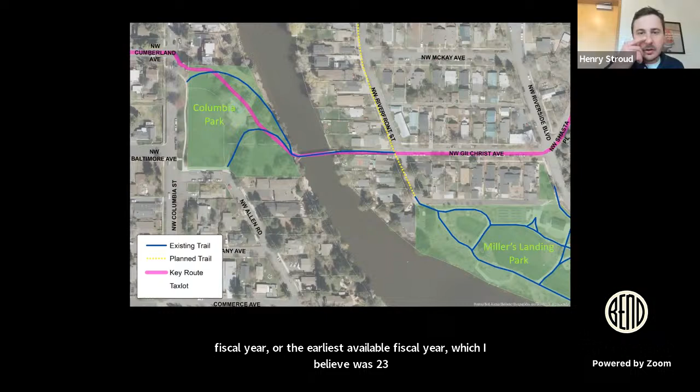So just to give you guys a little bit of a sense of the area, if you hit forward one time, there should be some pop-ups that come up. Yeah, do one more and show all of them. Go back. Yeah, sorry, you're fine. So there you can see the location of the bridge.

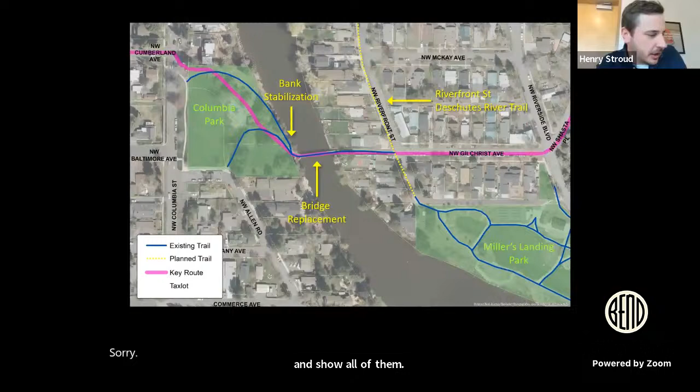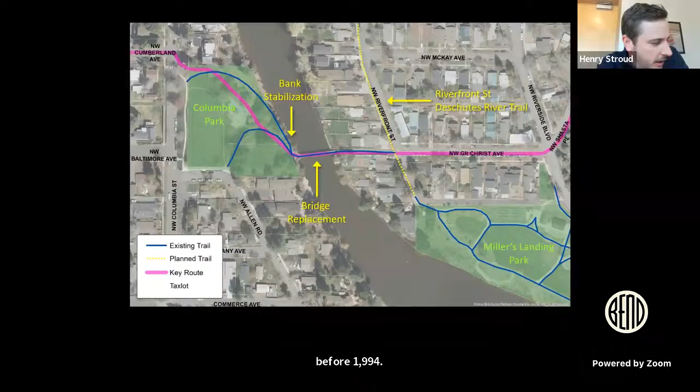The bridge is a wooden structure that we know was built before 1994. I don't know the exact date, if anyone knows it, I'd be really curious to know. But long story short, the bridge does not meet modern design standards for multi-use trails, and it's also started to see some structural deterioration.

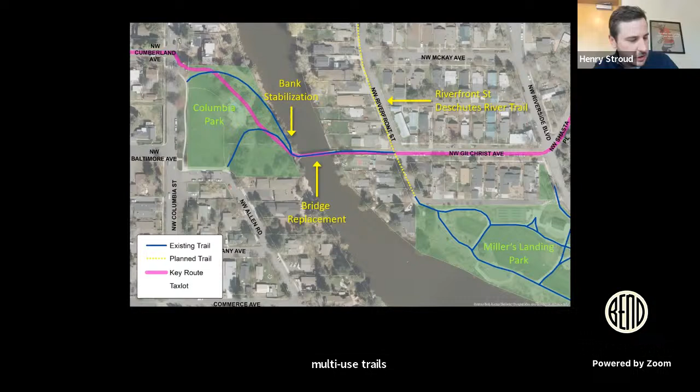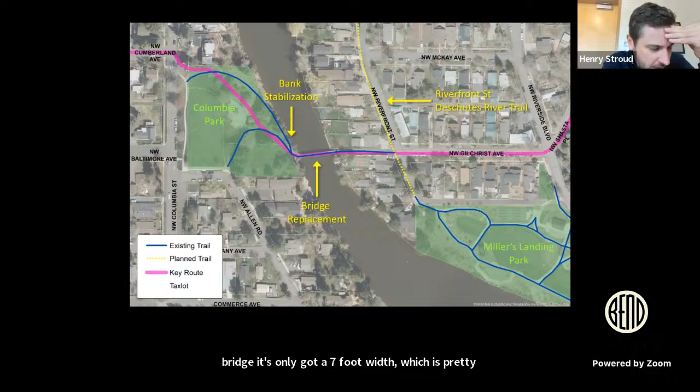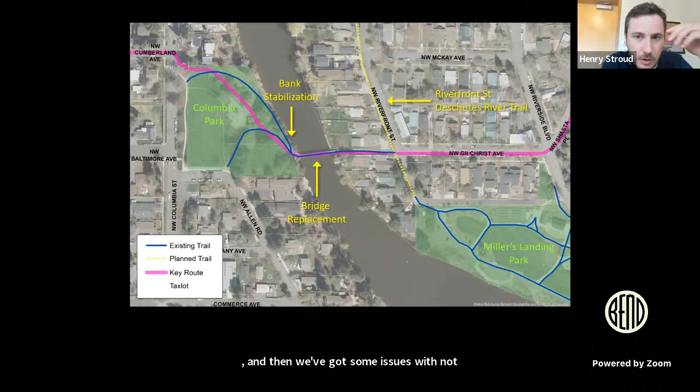More specifically, the current bridge only has a 7-foot width, which is pretty inadequate to accommodate two-way bicycle traffic. The wooden decking surface is really uneven, and we've got some issues with not meeting ADA grades on the eastern approach, when you're coming off Gilchrist Alley onto the bridge.

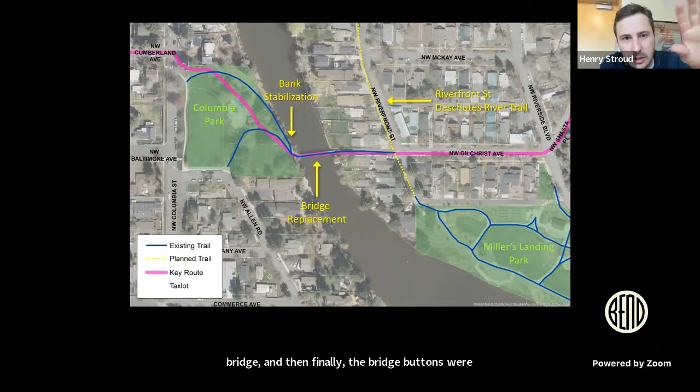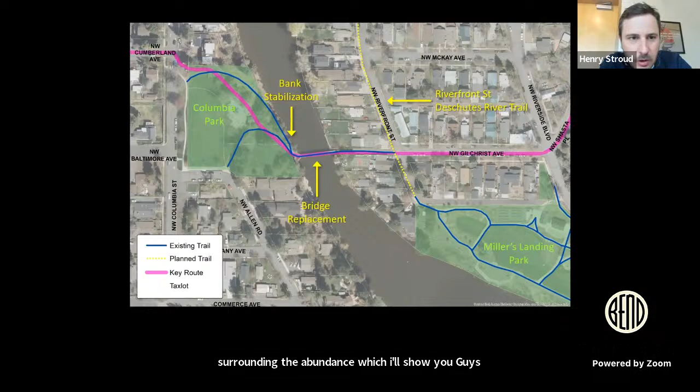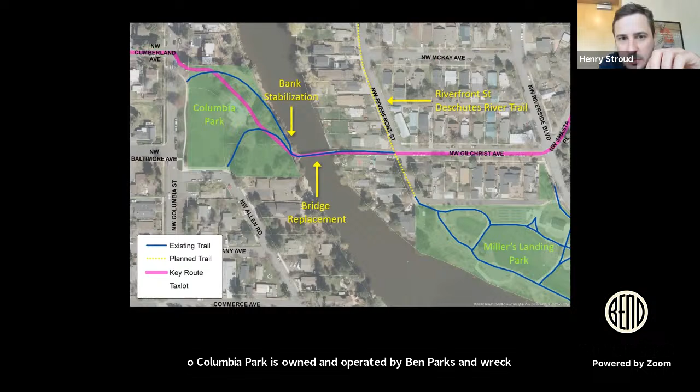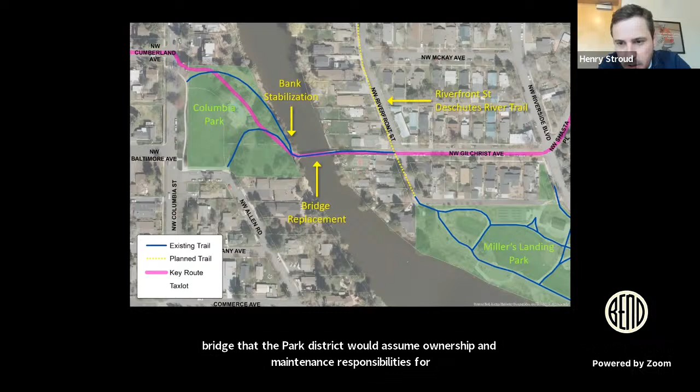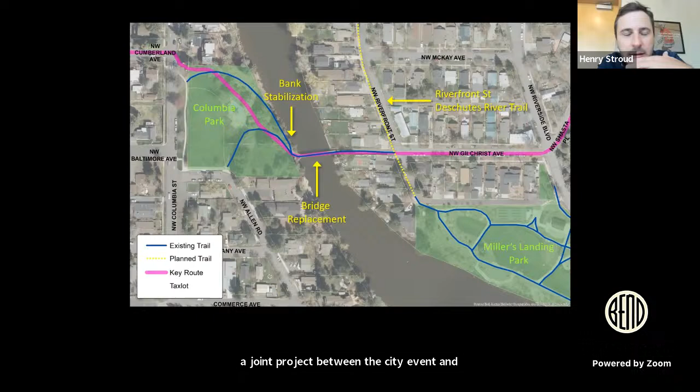So Columbia Park is owned and operated by Bend Parks and Rec. The bridge itself is owned and maintained by the city of Bend, but if we're able to replace the bridge, the park district would assume ownership and maintenance responsibilities. You can see the proximity to Miller's Landing Park, and of course the Riverfront Street Deschutes River Trail project, a joint project between the city of Bend and Bend Parks and Rec, partially funded by a grant from previous years, a previous STBG grant.

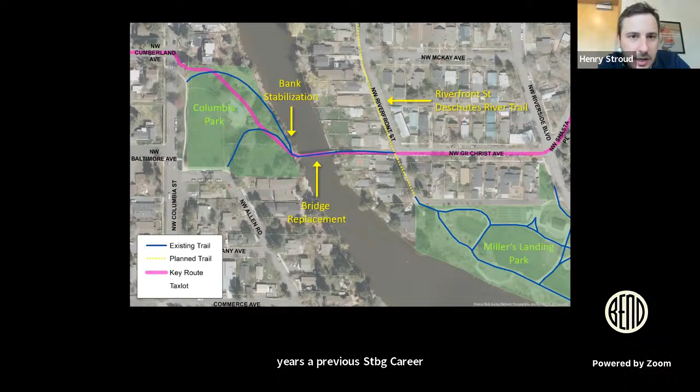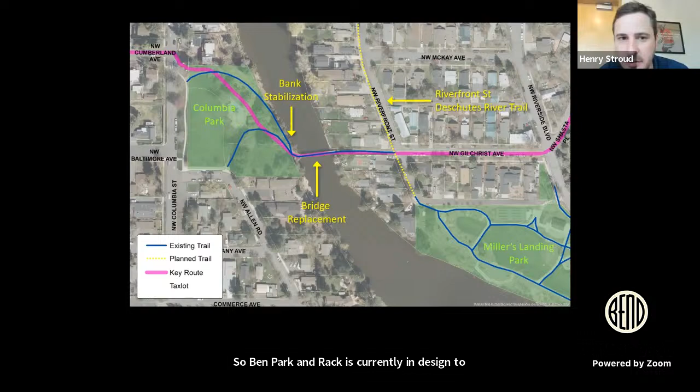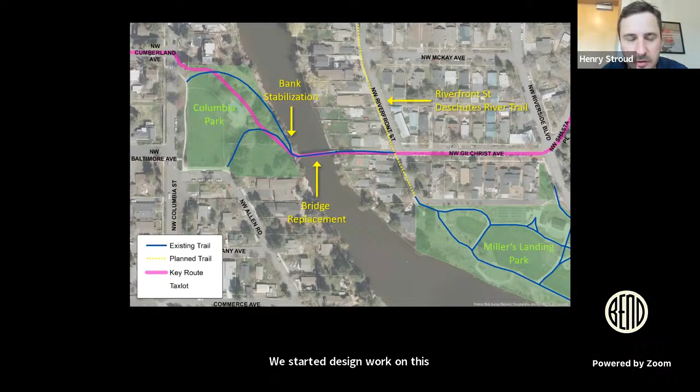The other thing I want to point out is the location of the bank stabilization project. Bend Park and Rec is currently in design to stabilize and replace a failing user access point that's located immediately adjacent to the bridge. We started design work on this project, I think earlier this year, with Environmental Science Associates, or ESA.

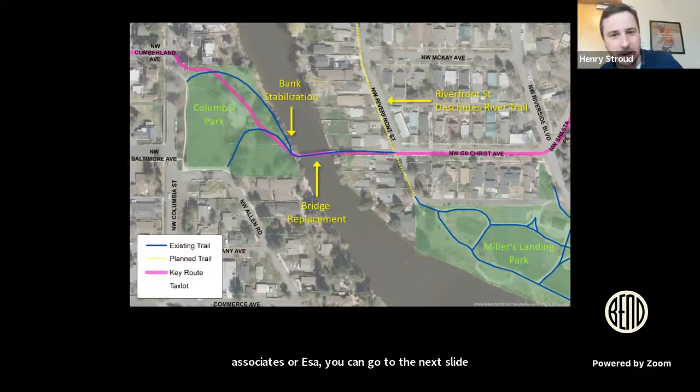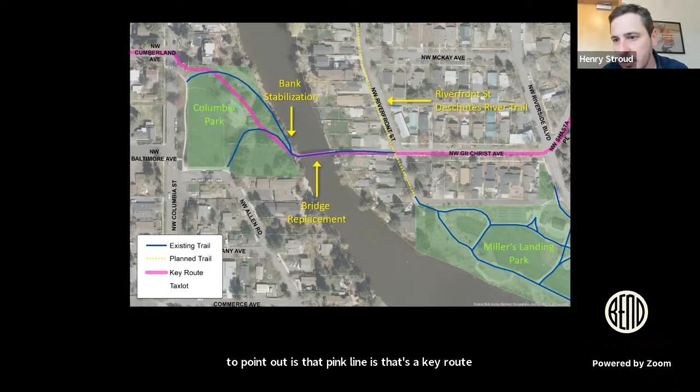Go back to the previous slide - the one other thing I want to point out is that pink line. That's a key route identified in the city's new transportation system plan. These key routes are areas the city has identified as priority corridors for improvements to the bike and pedestrian system.

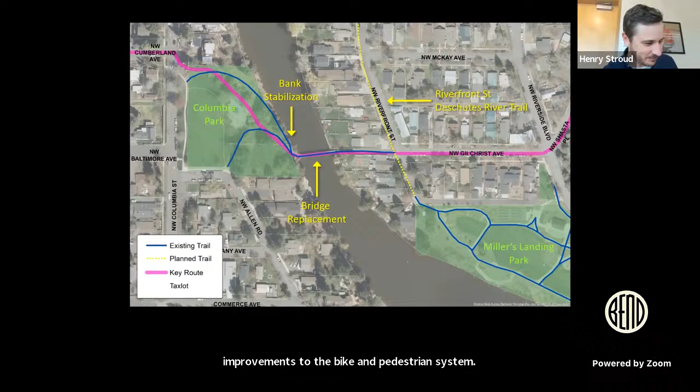That's the failing access point that we shut down a number of years ago and that we're currently designing. It's immediately adjacent, and we think that by incorporating the bridge replacement into that project, we have a much better chance to get a cohesive design and really redo this area all at once.

This is Greg Bryant. I've got a question - are you looking at trying to get that access point to the river again? Ian, do you want to step in on that?

That's a great question. We are currently working through high-level concept designs, which will be taken out to the public for feedback this winter. We have not decided whether there will be a new access point or if it's going to be closed off entirely. We're doing a complete thorough analysis of existing conditions, and then we'll be presenting two different options - full closure versus access to the public - to see if it's feasible or even warranted to reopen the access point. So the short answer is that we don't know whether there will be an access point there in the future.

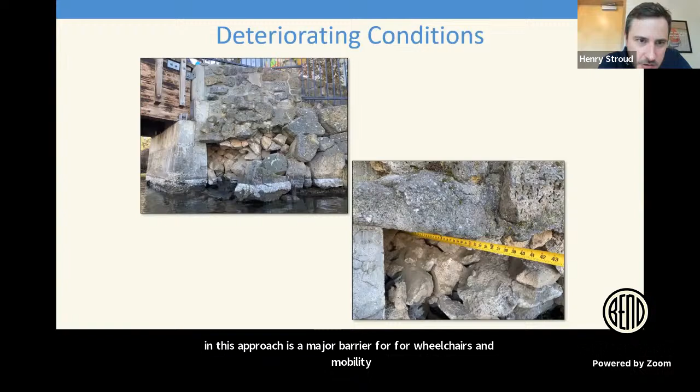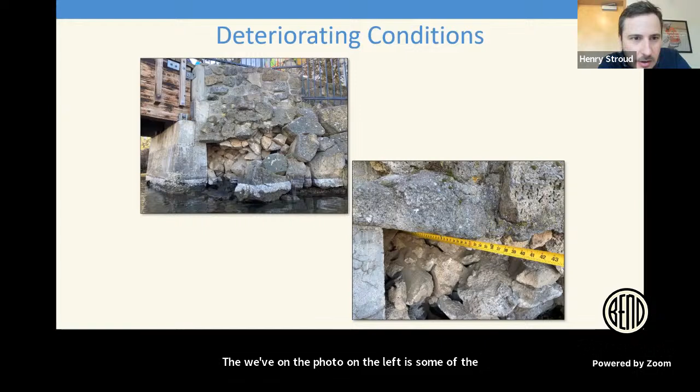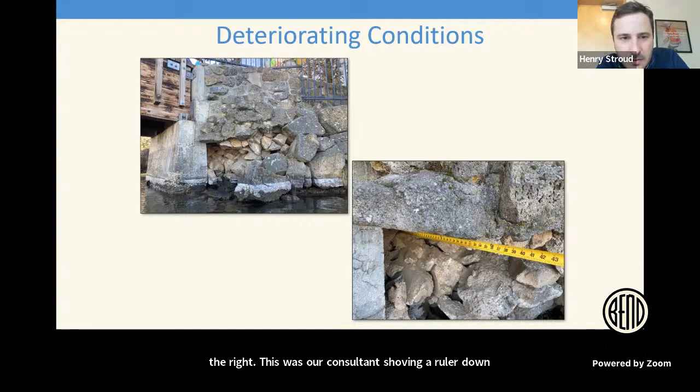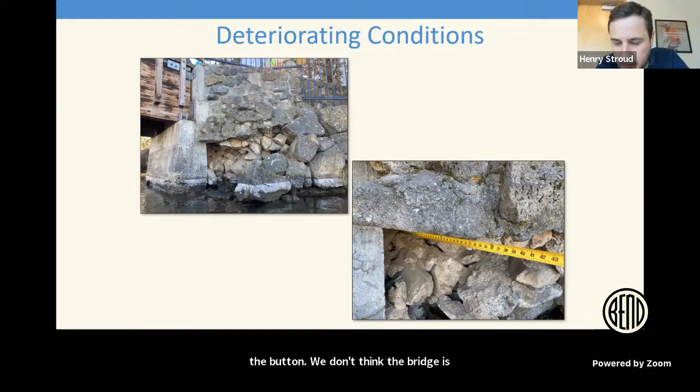And then here you can just see some of the deteriorating conditions. The photo on the left shows some structural failure of the rock retaining wall - you can see the concrete abutment to the left of that picture. On the right, this was our consultant shoving a ruler down there, where we've seen about 2 to 3 feet of cavitation of the structural backfill behind the abutment that's providing structural support. We don't think the bridge is at risk of total failure, but if this continues to worsen, it could be an issue.

So the total for that was $80,000. We've added a $10,000 contingency, which is pretty standard for our projects of this level, bringing our total project cost to $90,000. We're requesting $100,000 with the hopes that we can use the fund exchange program, assuming about a 10% fund exchange fee. So the grant amount would be $100,000, we'd lose 10 for the match, and that would bring us to the $90,000 available for the project.

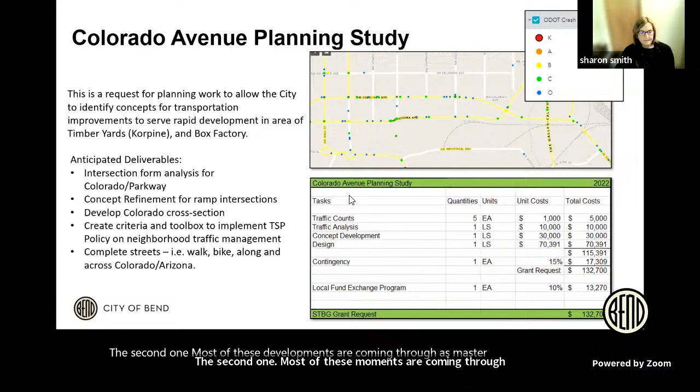Oops, no. Grant funding, yeah. All right, let me advance this. We're having some issues on our screen here at this end, but all right, you ready? I'll just jump ahead here.

So next one, Robin, we're on the grade separated trail crossing feasibility study. Okay, damn, can't see it. That's interesting, what are you guys seeing right now? We can see your slides. Okay, so that's good. On the right slide? Good. Okay, it looks good on our end. This must be a cable.

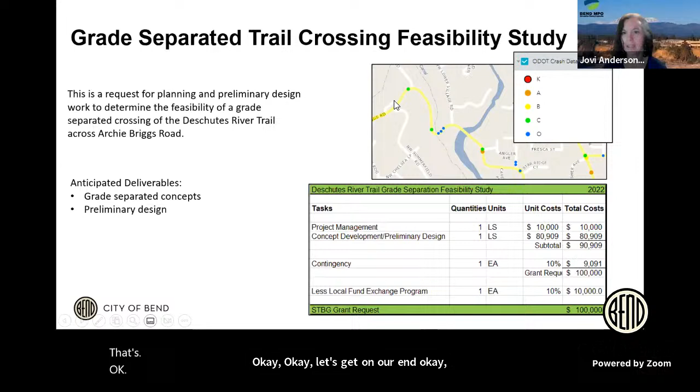This next one is a grade separated trail crossing feasibility study to try and figure out if we can grade separate where the Deschutes River Trail crosses Archie Briggs Road. Archie Briggs Road is a collector in the city of Bend, and where the trail crosses is on the screen. It's right between, it's the gray line just to the left of the Deschutes River, between the three blue crashes and the one green crash. As you can see, it's a really tight bend, so sight lines are really difficult for anyone trying to cross there. We have warning signs out there, but these crashes are rear end crashes, and we're really thinking they're definitely associated with someone trying to cross and surprising a driver.

Volumes are picking up on this road, and speeds are fairly moderate. It's just really that there's very poor sight lines. So we're hoping to be able to contemplate a grade separation and get us into preliminary design.

So how many crashes were there around that? This is 2015 through 2020 data, and there were 4 crashes right there. The 3 blue ones are property damage only, and the one green one is a level C injury, which is a minor injury crash.

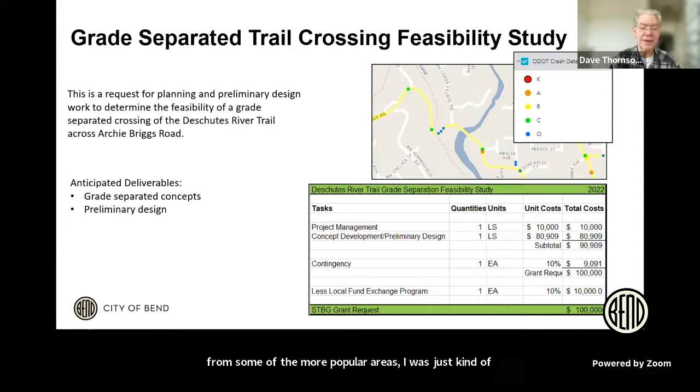That's fine, Dave. One issue is there's not a lot of parking available for that section of trail, but we just started a project to redo parking at Sawyer Park, immediately south of there, and we think that will likely increase trail users on this section.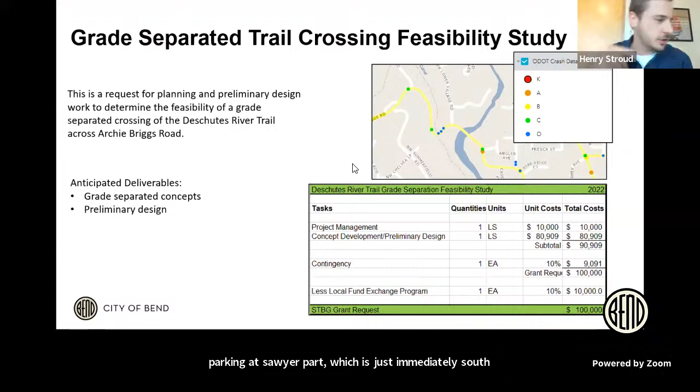This is Greg Bryant too. What were you thinking about doing, a tunnel or a bridge going over? The grades, particularly on the south, are high, and you come down into the approach, then climb a little bit back up. So we think an overcrossing would work.

Are you also looking at maybe a pedestrian flashing light, so as people come up to go across there's a flashing light rather than the cost of a full bridge, in case the grade separation concept doesn't work? Yeah, it's gonna be expensive to put a bridge over that. It would, and this gets us to the design, so we'd understand the cost, and then we'd have to go find funding for that.

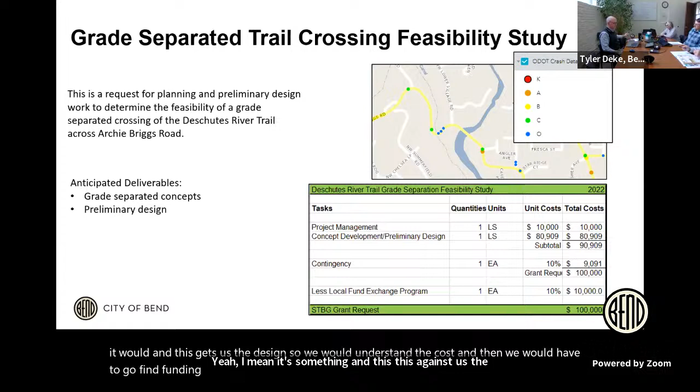So it's not a funded construction project currently. Okay, good. All right, Rick, I see your hand up.

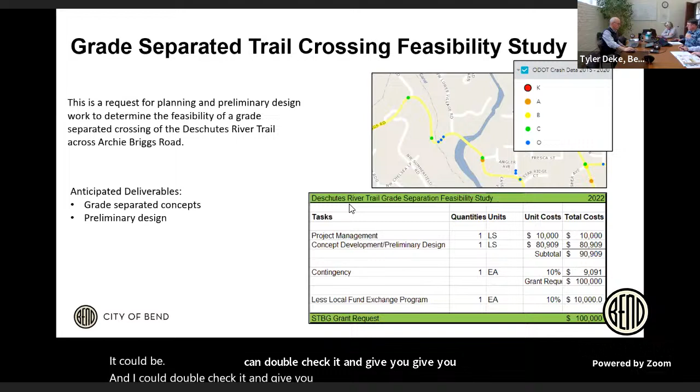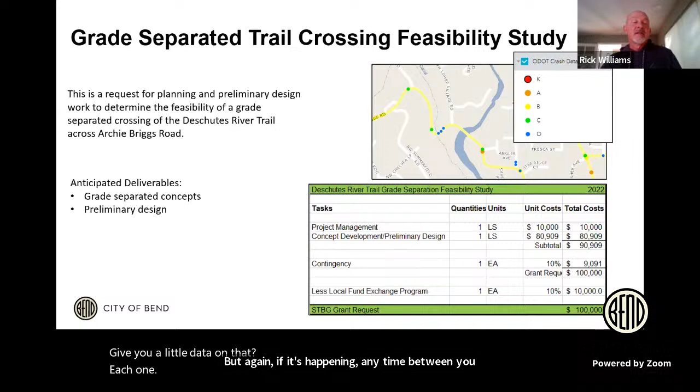Robin, just a quick question with your crash data, what time of year were the crashes? The reason I'm asking is this is a notoriously wicked grade with a couple of nice curves thrown in, and it's bad in snowy and icy conditions. I'm not saying your assumptions are wrong, but it could also be because of ice. I can double check and give you a little data on that. I know it's hard to find, it may say icy conditions, but if it's happening anytime between November and May, it could be weather related also. Thank you.

Okay, this next project is bike lane striping. The city is working on a corridor called Wilson Avenue, creating protected bike lanes, enhanced sidewalks, and a shared use path between 2nd Street and 15th Street. This corridor is a little bit isolated, our funding was right on Wilson, but tying those improvements into the city's low stress network and key routes, there are gaps going back up 2nd Street. 3rd Street is missing bike lanes, 9th Street is missing low stress bike lanes, and 15th Street is missing low stress bike lanes. So this project would allow the city to remove and reinstall striping to create buffered lanes and reduce the stress level. It's four corridors, striping removal and striping replacement.

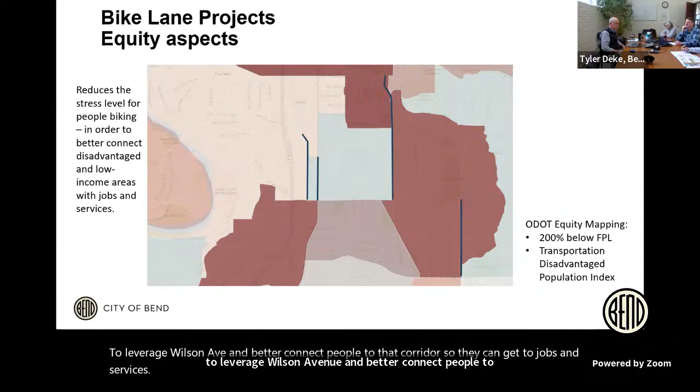I see Sharon has her hand up. Thanks, just a comment, it'd be helpful if we had a color code knowing what these different colors are. I'm sure you know it intimately, but...

The darker red just meant it had a higher percentage than the city average. Is the color code a combination of the 200% and transportation disadvantage, or are the colors reflective of those two different categories? No, they got more intense as you turned different metrics on and off. So these were the two metrics that popped in this area.

So what does the green then mean? It means it is below the average of these two. So there isn't a lot of people with a higher population of poverty or disadvantaged population index.

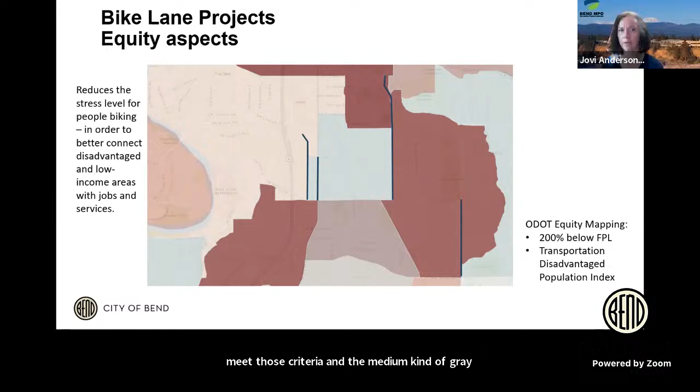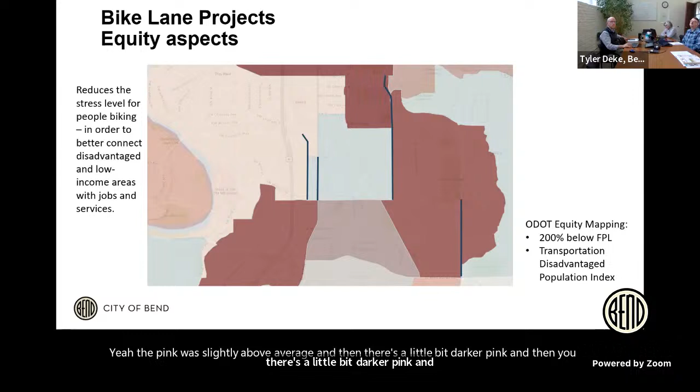And the medium gray between the two, dark red and then that would be below average. If it's any color besides that gray-green, then it would be higher than average, based on intensity. The pink was slightly above average, then there's a darker pink, and as you layer them it gets pretty intense.

This is zone 1800 if I recall, and that was one of the zones in the city that had the transportation disadvantaged population index.

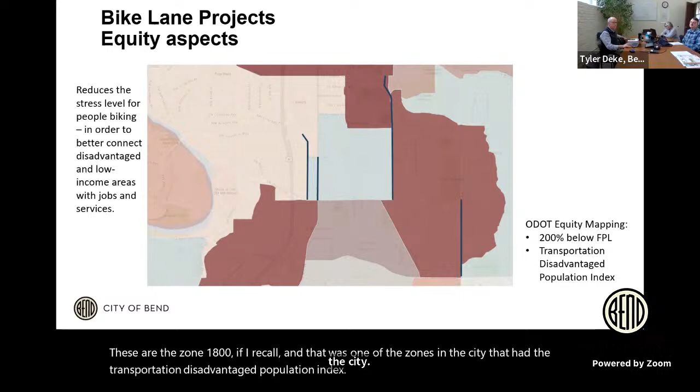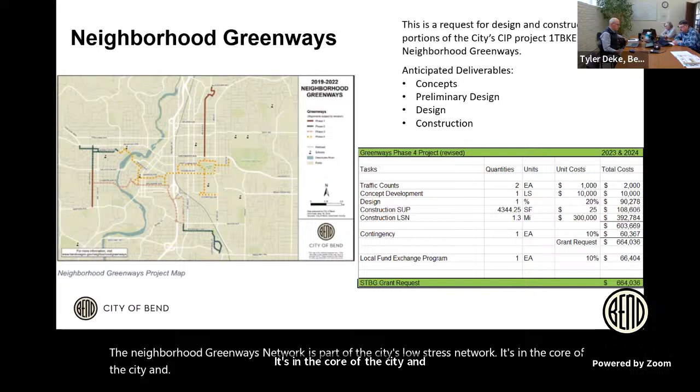The neighborhood greenways network is part of the city's low stress network. It's in the core of the city, and it works on both north-south connectivity as well as east-west connectivity. This project would enable that value added and enhancements.

As everyone knows, the price of things is going through the roof, so we want to put in adequate treatments, particularly on the shared roads and neighborhood greenways, and areas that need shared use paths, particularly 6th Street just south of the new Greenwood crossing. We want to get that funded. This one has 664 as the request, and again the local fund exchange is assumed to be outside of that.

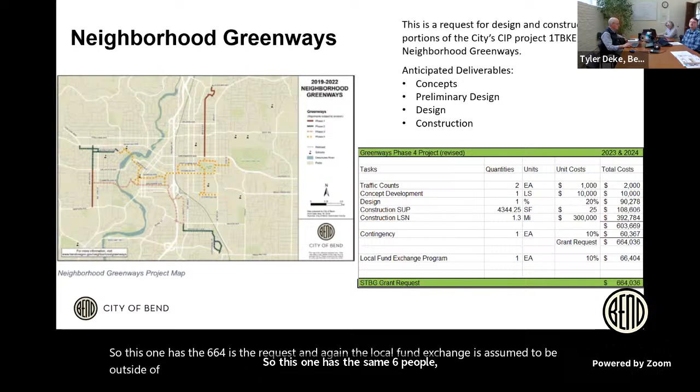It's hard to see on this map, but there are some traffic signal icons marking key crossings of major roads, the 5-lane roads in the city. The little tiny icons are buses, showing where our bus stops are. This project is really trying to connect people and places.

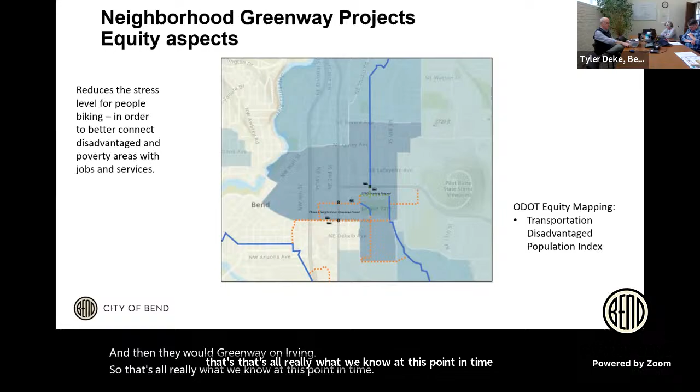So this one moves into federal funding, or at least from the gate, assumed federal funding. It sounds like there's some other discussions on that.

This is a Safe Routes to School education program. The request is for about $70,000 for 3 years each year in order to have the city deliver safe routes to school education and encouragement. Commute Options had been doing this work through some funding through ODOT, but that funding has gone away. Right now there's a real gap in our ability to reach out to students and work on the hands-on aspects: getting them on bikes, getting them out into the field, having them learn how to cross the street safely, learn about our city's network, and where are safe places to walk and bike to get to school so that they understand those safe routes. This funding is about what ODOT had been funding. It's a little higher just because it's federalized. That's how I got these numbers.

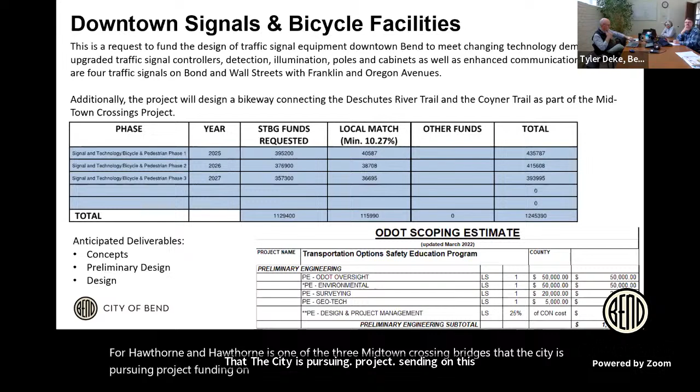The next part of it is to run the survey, concept development, and design process for Hawthorne. Hawthorne is one of the 3 Midtown crossing bridges that the city is pursuing project funding on. This project would allow the city to connect that bridge over to the Deschutes River Trail on the west side, and the Coyner Trail on the east side. It's assumed to be a separated bikeway on Hawthorne and Oregon Avenues.

Is that cost just baked in here, with the costs you've identified on the spreadsheet? Yeah. And this is just for design of those 4 signals, correct? Yes. Do you have any idea what it would cost to replace all 4 of those signals? Probably around $500,000 each.

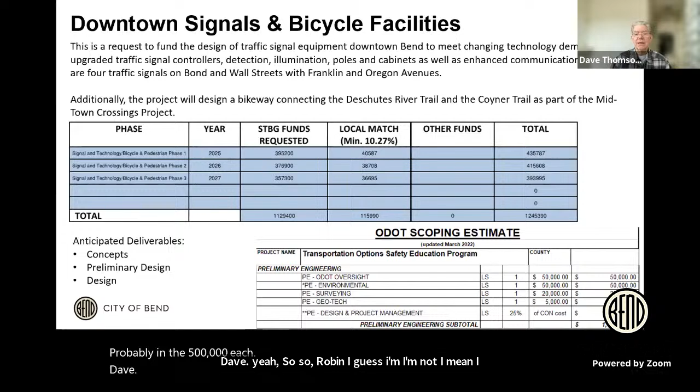Dave? Yeah, so Robin, I understand the need to replace the signals, but I don't understand the specific bike-ped enhancements that provides. It's not necessarily bike-ped - with any traffic signal there are multimodal aspects. There are push buttons, and right now I think these don't have push buttons, there's no bike detection, it's a shared lane. So there are minor aspects that would be considered for walk-bike, but this is primarily for the multimodal aspects that would be vehicles, cars, buses.

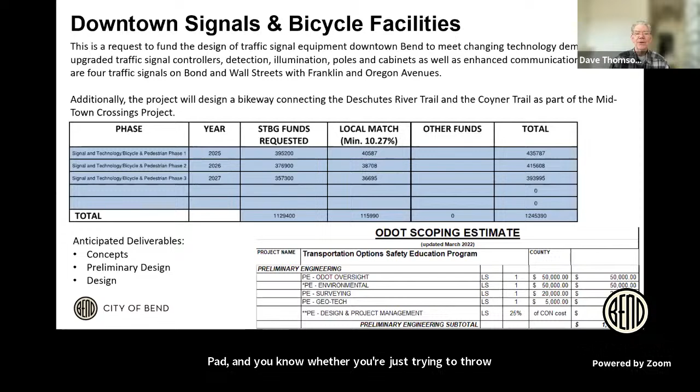Okay, so that adds to my question about why this is being combined with a bikeway design, which is specifically focused at bike ped, and whether you're just trying to throw the signals in there to get them under the umbrella of bike ped. I don't know, I'm being kind of...

No, it's on Oregon, it's definitely combined, because when you do the separated bikeway, that changes the approaches and where your detection is. With the Franklin signal, there is some bike on it. I mean, obviously there's a bike lane, but we were trying to go for that efficiency with pollution and idling, and try and get the city in compliance with some of our goals as far as our climate action plan.

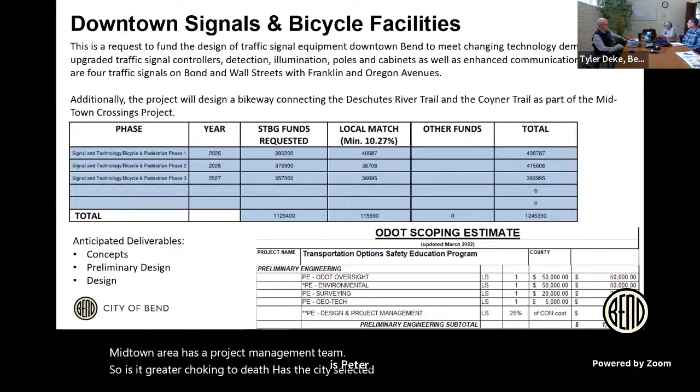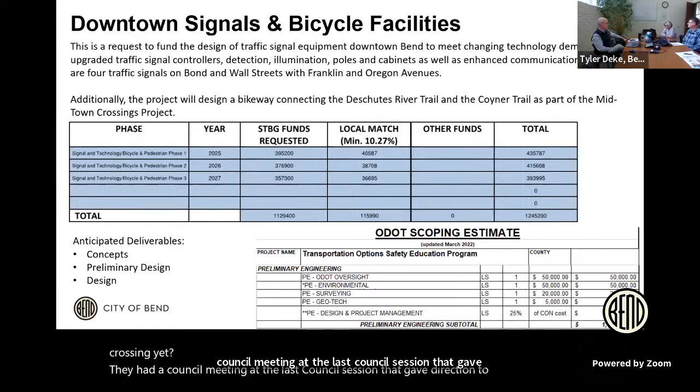Has the city selected the Hawthorne grade separated crossing yet? Well, they had a council meeting at the last council session that gave direction to staff, and so the Hawthorne corridor was prioritized, as well as Greenwood, as well as Franklin. So we got really clear direction to deliver three.

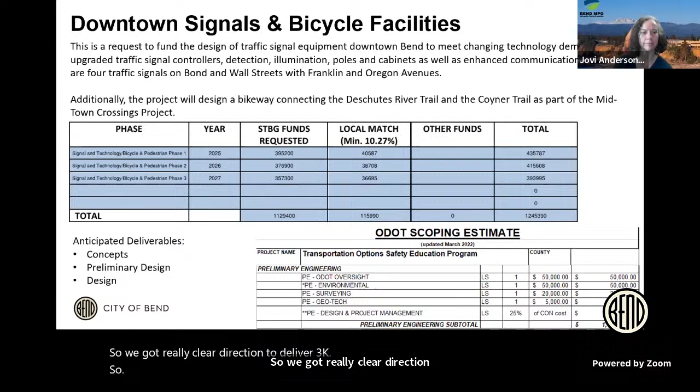Thanks, I'm a little confused by the screen, and maybe it's just a titling disconnect. So the project you described is in blue for 1,245,000, and then underneath it, it says ODOT scoping estimate for transportation option safety education program. I'm not catching the two of those together. The first is the screenshot from the application, the second is a screenshot from the attached ODOT scoping estimate. Those are both submitted as part of the application. But it's not for the transportation options safety education program.

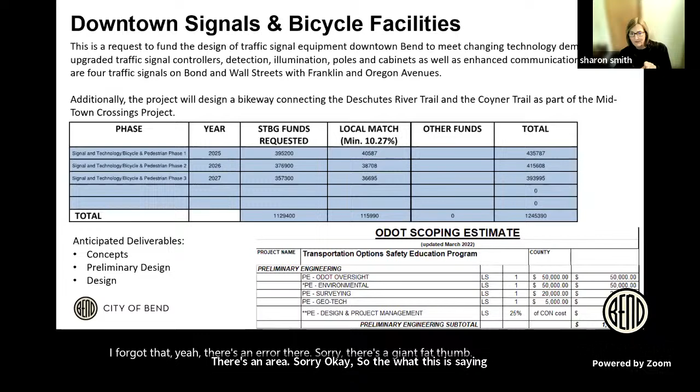No, I forgot, there's an error there, sorry, there's a typo, a giant fat thumb. Okay, so what this is saying is that the ODOT scoping estimate for the project above is 1,129,000. There's two different methodologies. The ODOT scoping estimate auto-populates quite a few things, and it came up with 1,129,400.

Oh, but you got a local match. Okay. Yeah, and I think, yeah.

I mean, Robin, the two signals on Franklin, those have to be in the bottom three or four signals on the entire city system, aren't they? Yeah, I mean, if you go out there, they're very dark. Both of them have corners that are pitch black because there's no illumination on those poles. One of them we were able to wire temporarily last winter, so it does have some light, but again, only on one half of it. The other half is completely black, so you can't see anyone standing at the side of the road.

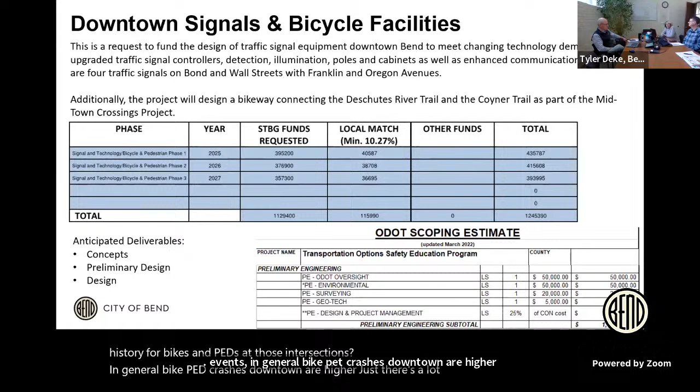So is there any crash history for bikes and peds at those intersections? In general, bike ped crashes downtown are higher, just there's a lot of activity, a lot of nighttime activity. We were able to secure an ARTS grant from ODOT, particularly to install illumination on Franklin because the corridor is so dark. And that's a little bit east. So the mix of crash types downtown are more evening activity crashes when it's dark.

Okay, this is Greg Bryant. So none of these were included in the $190 million project that was approved for Bend, right? Nothing's remaining for these, right? These are different, right? Yeah. Or is it, okay.